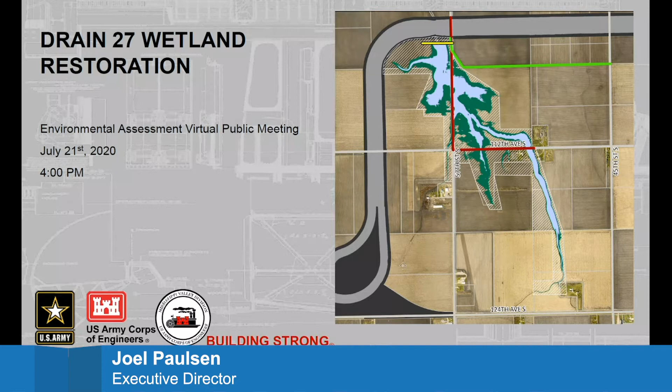Thanks, Joel. It's also worth mentioning, on the comments piece, that we had a meeting previously on April 30th with some of the impacted landowners, and some of the comments we got from them will also be used as feedback to improve this project as much as possible. We've also had a number of meetings with our project team to come up with the best design possible, and with different state and federal agencies—we just had a meeting last week to get their input, including North Dakota Game and Fish, North Dakota Department of Environmental Quality, and the State Water Commission, among others. So we're taking comments not only from the public, but also from those agencies during this time.

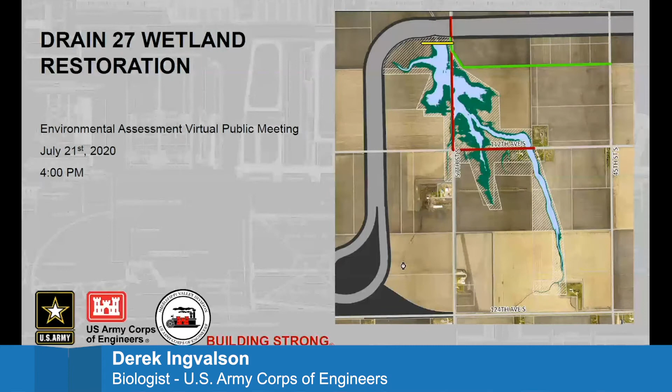Then we're going to jump into a little bit of wetland background. If you were on that April 30th call, some of these slides might look familiar. We just want to make sure that people are all educated on what the wetlands are, what that means, and so forth. Then we'd like to go into reasons why this was chosen as the Wetland Restoration Project.

There's a number of different options out there. Those weren't all the same. There's pros and cons to each of them. Ultimately, this was the one that was chosen, and we'll go through that.

Then we'll move into the design. We've got a lot of really good people working on this, and we've gotten a lot of feedback from the agencies and trying to make this the best that we can. We've got the mitigation that we need to fulfill, but we're working with those agencies to make sure that they've got goals and objectives when it might come to habitat or other things. And if we can help meet those needs as well, we might as well incorporate some features that would help with that. So we'll talk about design and what all went into that.

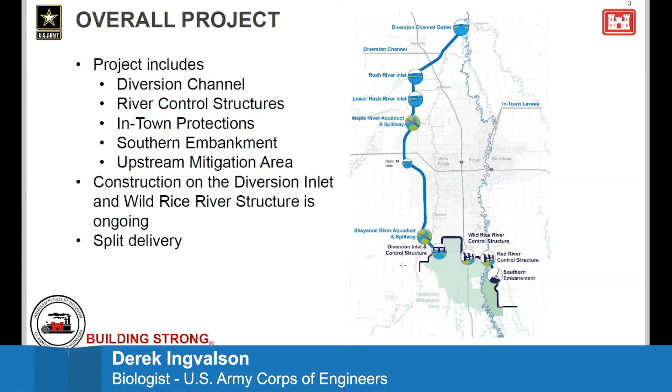With that too, the wetland mitigation for the diversion channel is being completed within the diversion channel itself. The southern embankment and those structures along the southern embankment — that's what the Drain 27 wetland will be mitigating for. So we'll go into that a little bit more as we go along here, but next slide, please.

The second one, hydrology — you have to have the right kind of water there. If you don't have the water there, you're not going to have a wetland. You may not need as much as most people think; it doesn't have to have standing water all year long. The hydrology needed for a wetland is saturated conditions for 14 consecutive days in a year. And then finally there's the vegetation, and vegetation in wetlands isn't just what most people think of — cattails and lily pads and that sort of thing — there's a number of different wetland types.

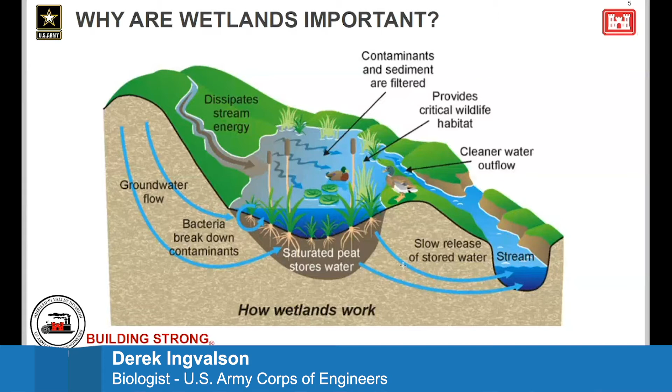They have a lot of great functions, including water purification. They provide flood storage, process carbon and other nutrients, and slow down flows to help reduce erosion. They also can lead to a number of recreational opportunities, such as hunting, bird watching, hiking, and canoeing.

Wetlands are also very important to the animals, the critters that are out there. Wetlands have some of the highest diversity of any ecosystem, and a lot of times you'll hear that they're just behind rainforests and coral reefs as far as diversity goes. Waterfowl use them a lot, obviously, and a lot of other bird species do as well along their migratory route. It's a great place for them to rest, to fuel up on vegetation or little critters they're eating along the way.

There's also several waterfowl species that may nest in wetland areas, like dabbling ducks. That includes mallards, teal, wood ducks, and several others. They have a lot of different value to those species.

Then there are species you may not think of as often being out there, like salamanders or other rare and conservation-type species, especially in a wetland like this one where there won't necessarily be any fish, because there isn't a connection to a waterway most of the time, and even when there is, it'll freeze out over the winter. That's very good for those amphibian species, to not have those predators in the area.

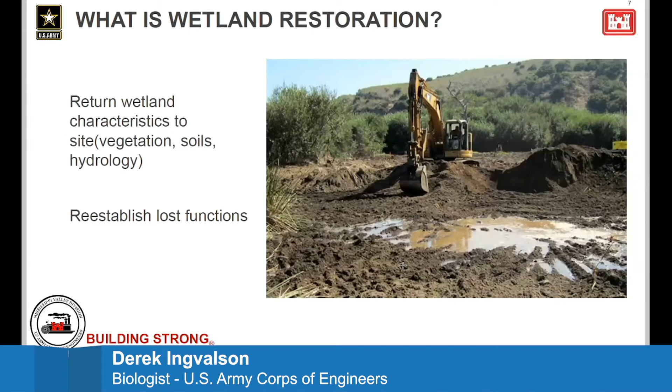So why is this project being considered? There's a number of different reasons. Joel talked about this a little bit in the introduction, about how we need to mitigate for unavoidable wetland impacts. And I guess the question is, where does that take place?

There were different options we looked at. We looked at a few different sites, bounced back and forth, and looked at the pros and cons of each. Most of them in the end ended up being dead ends after we looked at the pros and cons; they just didn't make much sense anymore.

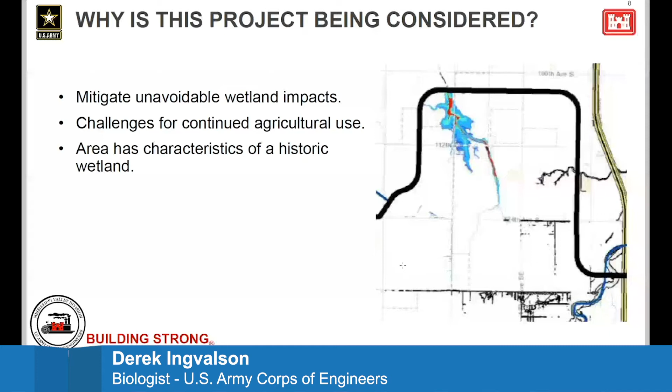So we had the opportunity to create this into, or restore this into wetlands, and we started looking into it more, and it started making more sense. Instead of trying to look at solutions to try to keep this dry, it made a lot more sense to make something wet that wants to be wet. So that's where we went with the wetland restoration with drain 27.

This slide is just taking a step back and looking at the southern embankment. Where is the project located? If you're familiar with where the diversion inlet structure is and where the Wild Rice River control structure is, it's between those two, kind of in the area known as the camel hump area that humps up between those two structures, and it's toward the western edge of that area.

Now the next few slides, we're going to talk about the design a little bit and go into some of the features that are in that design. There are several features within the complex here itself.

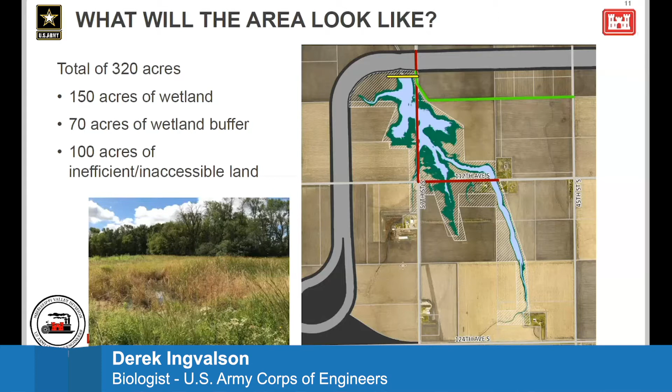Next we're going to go into more in-depth discussion on assessments that were done to help design some of these features. So I'm going to turn it over to David Hilgeman—he's a hydraulic engineer at the Army Corps, and he'll go through the next several slides. David, go ahead.

David, are you on mute? Rocky, do you need to unmute David? I certainly can. He must be calling in by a phone number. I assume he's the 651 number. No, I don't think so. Maybe he was unable to join us. I thought I saw him on here earlier.

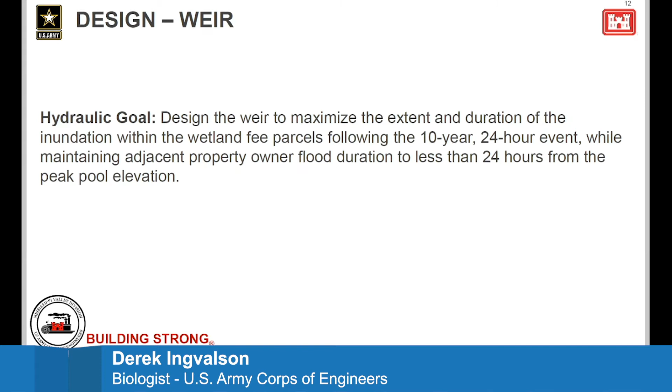Okay, so part of the design of this project was to design this weir that goes across the wetland, so that we have a wetland functioning for the majority of time, but also that the parcels around the wetland, that the 10-year, 24-hour rainfall event would allow the property owner flooding area to be drained outside of the boundaries in less than 24 hours from when the peak water surface elevation is in the pond, the wetland.

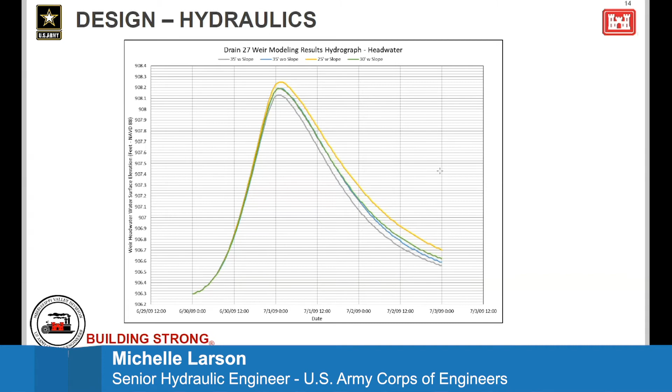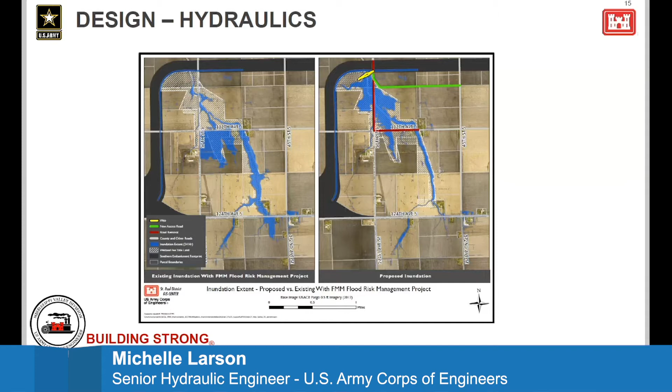Next slide, please. Okay, so the left-hand side is the previous image with the existing inundation. So if the Fargo-Moorhead project were there, this is what the inundation is going to look like.

The image on the right hand shows us the project that we're proposing for the Drain 27 wetland. So you can see lines showing where the roads are going to be removed. The yellow line is showing us that weir that kind of blocks off the Drain 27, and the green is just an access road there.

So sometimes people ask, well, why is there more inundated area shown with this project when there's a weir across it than with existing conditions? That's because with those roads there are some culverts through those roadways that are undersized, so water doesn't drain off as efficiently. If those roads are removed, those culverts are removed, the water farther upstream can actually drain better, and it'll concentrate more closer in our wetland area itself.

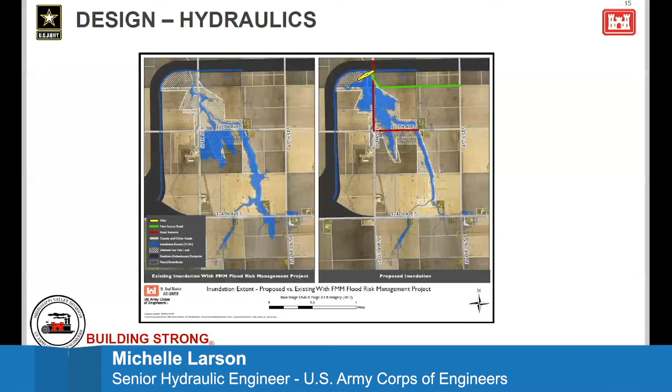Derek, should I keep going? Yeah, go ahead if you want, or I can jump in.

It doesn't matter. Okay, so in our weir, one of the things we want to design into it is a low flow pipe. This would be a way that if maintenance is needed, some of the water could be drained out of the wetland so crews can go through and weed it, remove sediment, or whatever they have to do.

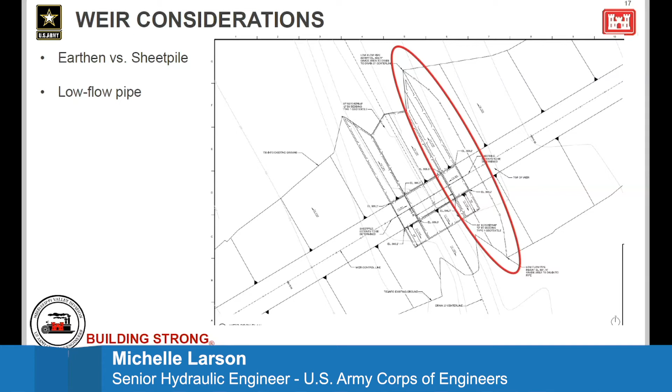Yeah, so I can jump in there a little bit, Michelle. That low flow pipe's primary reason is to have another option for maintenance. If anything happens to the structure, like erosion, or repairs need to be made, it could be drawn down for that. Also, if we don't get the vegetation response we're expecting within the wetland, that gives us an option to open it up, drain it down, reseed, and start over with the vegetation within the wetland complex.

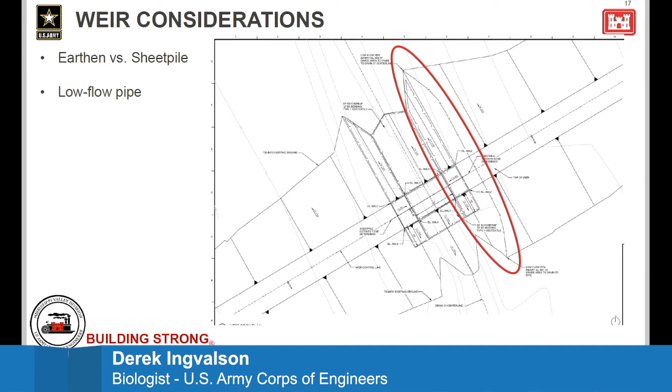Next slide. I'm not sure. This is all earthen versus sheetpile.

Another design aspect we've been looking at is recreation. Recreation isn't a feature being considered as part of this project at this time, as part of the Drain 27 project, but it is being looked at by MetroCog as a whole for the entire Fargo Metro project. They currently have a recreation plan as part of the Agassiz Greenway Master Plan—I've provided a link on the screen for folks interested. They're also looking for ways to get funding, whether state, federal, or whatever, to pay for recreational features.

That said, even though we're not looking to have recreational features as part of the Drain 27 wetland restoration, we want to make sure we're making things compatible with them. So we've had a few conversations with MetroCog, asking what thoughts they have, and trying to lay out good places for trails, kiosks, and trail accesses. So we're keeping them in the back of our minds during design, not necessarily moving forward with them as part of our project, given different restrictions we have at this point.

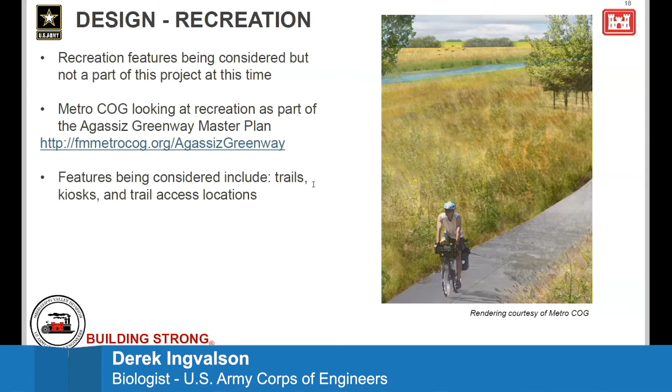Next slide. Now we'll start to talk about drainage. This is a concern that came up at the April 30th meeting—folks wondering how water leaves their land and how that works over the duration of construction. So we'll go over some construction sequencing, and Michelle will walk us through that as well.

Okay, thanks, next slide please. This is showing existing conditions—an aerial photo of Drain 27. You can see the flow arrows through there. Vertically through the middle of it is 57th. My image disappeared, but there we go—Drain 27 crosses 57th Avenue as it goes through there. Next slide please.

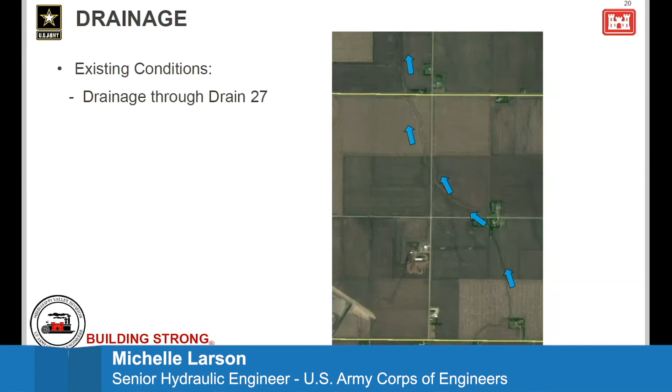Okay, so this is what it would look like with wetland construction. During the sequence of scheduled events in the area, this wetland construction would start in 2022. The weir and access road would be built, then those two parts of road removed so the flow can fill up and go into the wetland. When water leaves the wetland, it drains back into the same Drain 27 channel downstream, just like it usually would. Next slide.

So then the next piece to be constructed would be the southern embankment, SE-2A—that's the piece shown in the lavender color on the screen. That's going to be built in years 2022 through 2023. While that's under construction, and once it's done, water will still be able to go through Drain 27. It enters the wetland and leaves through the weir, continuing back down the Drain 27 channel. Next slide.

Then in 2023 through 2024, the southern embankment, the SE2B, is going to be constructed. They're going to be leaving a gap in the southern embankment so that drain 27 drainage can continue on. The actual distance of this gap is still being analyzed, but what you're seeing there is the minimum size. It could actually be larger than that, but that's what they have there. Next slide.

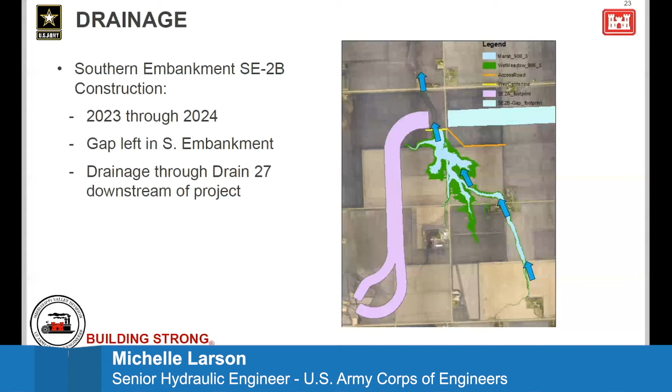So this is showing the project fully constructed. The lavender thing you see there is the full southern embankment. Down at the lower left-hand corner is the inlet structure to the diversion channel. There's going to be a borrow ditch that goes alongside the embankment on either side. So water is going to enter drain 27, the weir will be there, it'll flow over the weir, and it will flow into the borrow ditch. This gap in the southern embankment is going to be the last thing filled, last thing constructed, so that the water can flow there.

Once the water flows over the weir, it will flow into the borrow ditch. Right there, it's showing some flow arrows going away from drain 27. The actual split of where it's going to flow, to the north or south or east or west, is still being finalized, but it may end up being at 112th Avenue, which I don't know if someone can point out on the screen.

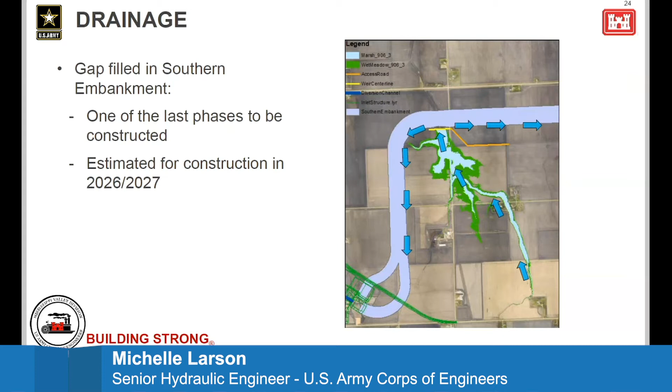Michelle, I think the next slide might show it better. It still shows the drainage this way, but it has 112th on there.

Okay, there we go. This is just another view of this. You can see where the roads have been removed, those are the red. The access roads in green, the weirs in yellow. You can see the flow arrows coming through the little channels upstream and ending up in drain 27 wetland, and then the flow going alongside the southern embankment to drain into either the Wild Rice River or the inlet structure.

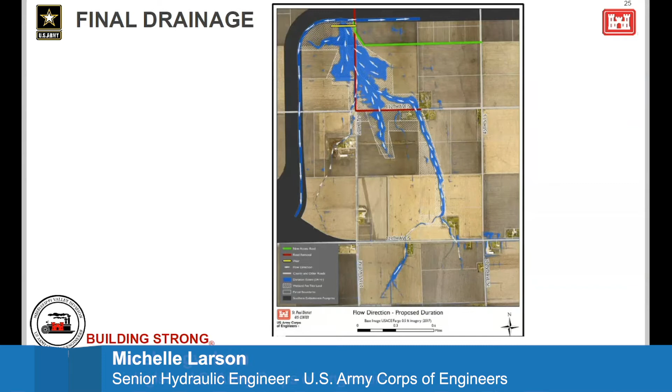I think that's it for mine. Derek, back to you. Thanks, Michelle. Next slide, please.

Actually, we'll go to Leanne. She's the biologist that put together the environmental assessment, and she'll talk through some of the environmental effects from the project. So Leanne, go ahead. Okay.

So what are some of the environmental effects of the project? The first one we want to discuss is agriculture. With the project, approximately 1 mile of drain 27 would be abandoned, and about 300 acres of land that's currently being farmed would be taken out of production.

The Wetland Restoration Project has been designed to ensure that farmland outside of the project parcels is not inundated for more than 24 hours following a large summer rainfall event. Also, in order to fully restore the wetland, we have to remove portions of 57th Street and 112th Street — 4,300 linear feet of 57th Street and 2,700 linear feet of 112th Street. We are, as a team, working to make sure that affected residents would have alternate routes for traveling in and out of the area. Next slide.

The project would have an overall long-term beneficial effect to wetlands by restoring about 84 acres of wet meadow and 66 acres of marsh-type wetlands. As Derek went over earlier, restoration would provide habitat diversity, wildlife habitat, and also the ability to improve water quality by filtering out sediments, nutrients, and pollutants. We're also going to see a big difference in the vegetation in the area. Currently, the area is in row crop production, and that will change to native wetland and prairie vegetation. If anybody is interested in the species we plan to plant, we included the seed mixes as an appendix to the environmental assessment.

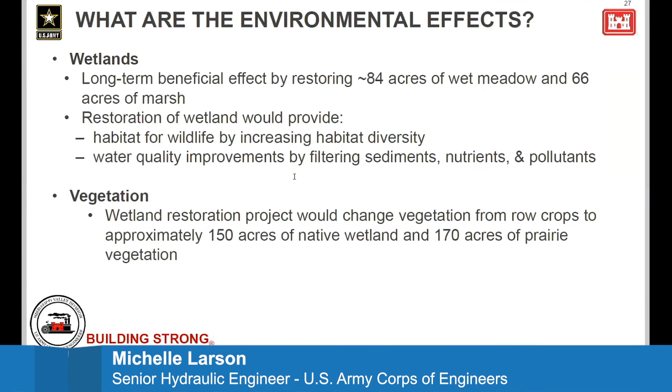Rocky, can you go back to slide 17? Okay, go ahead. So the earthen embankment would be what we refer to as a broad crested weir—trapezoid shaped, similar to just an embankment—with a riprap covered slope on the downstream side to help dissipate energy.

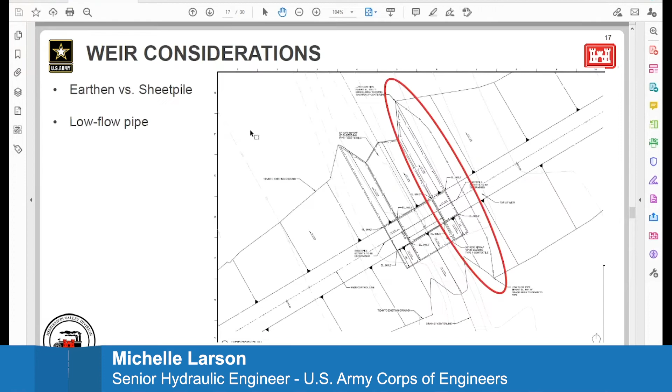Then if we did a sheet pile weir, it'd be what we call a sharp crested weir. The water would go over the top of that weir and fall for a few feet down to some riprap to help dissipate energy before continuing downstream. The notch for the sheet pile weir is a 25-foot wide notch, and the discharge through these different types of weir differs based on the geometry and how smooth the flow is.

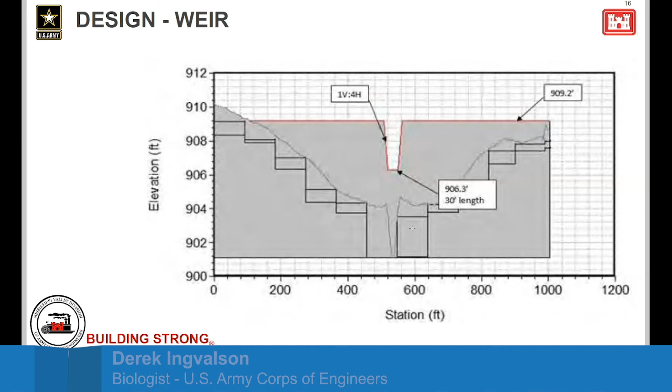So what section was it? I'm curious, in what township? Somebody could look that up, I'd appreciate that. Is this Christy? Yeah, Christy, I can get back to you on that. I just don't know off the top of my head.

Say, Derek, this is Lyndon. Was that with respect to that Drain 51 wetland site that we were taking a look at? Or is that a different site? It was the one that was going to be potentially overbank excavation along the river there, I believe. Okay.

Well, you can mitigate wetlands anywhere in the United States. You can go 30, 50, 100 miles to the west, and there's willing sellers for 1/50th, 1/100th of the cost of what this project's going to cost you. So I don't understand why you would even consider putting a wetlands in this flat ground.

Because once you saturate that 320 acres and the cattails come, the water ain't going to drain. So a 2-inch rain event in May or June, our crop is lost. With this wetlands in our flat ground, we will never harvest a crop again within that 3,000 acres.

It's expensive. Michelle, have you been part of that gap analysis, or Lyndon? This is Michelle, no, I haven't. I can't help you with that. Okay.

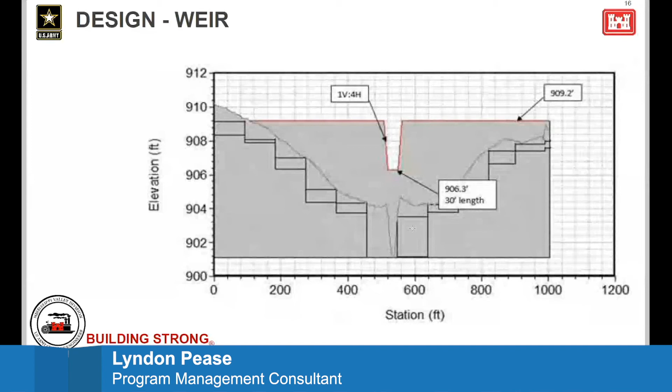Hey, Derek, this is Lyndon. I've just been in a couple of meetings, and I know that gap analysis is in progress. It's part of the Southern Embankment design, and so that's still being studied and evaluated. Part of that gap analysis, Mike, is looking at what the best size of that gap is to make sure impacts are minimized overall during that interim time period when the project's being constructed but not operational yet. So unfortunately, I don't have an answer for you on that one.

This is Mike Dubord, talking for my mother. We've got 160 acres there, and about half of it will be taken. Why not buy the whole 160 acres from us? Then I don't have to worry about it.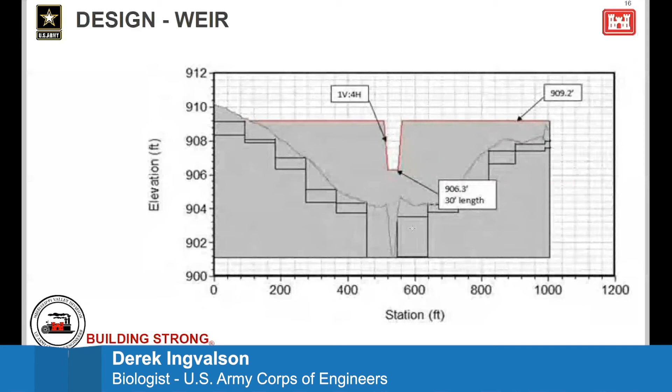Dean is part of the land acquisition team, and he might be able to answer that question better. Hi, this is Dean with AE2S. I believe the Dorothy Dubord parcel is on the southern edge, just south of 112th Avenue South. Is that correct?

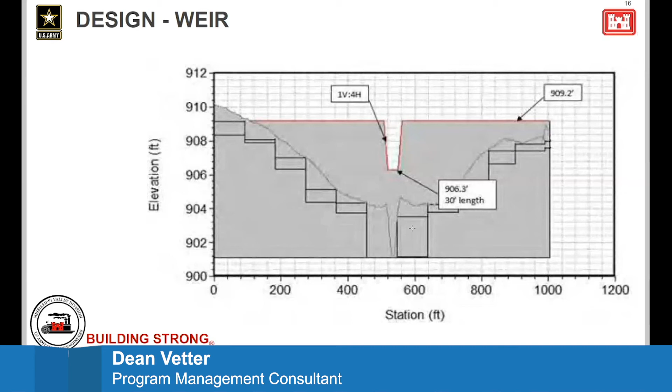We can look at those scenarios because we've done some full acquisitions in the area, especially in what's referred to as the Camel Hump area. On one of the maps you had shown, you got two different shaded areas.

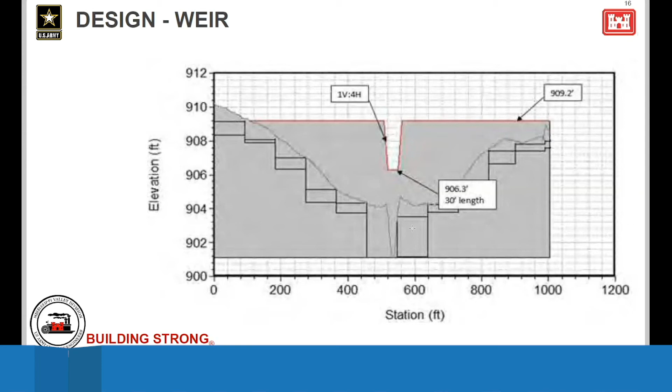Rocky, can you jump to one of the overall project maps for Derek? Okay, you see, you got two different shaded areas, the hashed areas. What's the difference between the two?

So I can cover this one. You've got the blue, light blue, and green areas. The light blue is a marsh-type wetland. The green area is like a wet meadow, which might resemble more of a prairie-like wetland, a transitional wetland. Then you've got the hatched area, where we went through and looked at different parcels and tried to determine the best place to break the parcels.

I understand that, but in the hatch areas, you've got two different sections. Oh, you mean where there's maybe boxes of hatched areas? I was just wondering what's the difference between those two hatched areas. Yeah, I think that's just a product of the map layer being made. They could probably be dissolved together so that it was one continuous area.

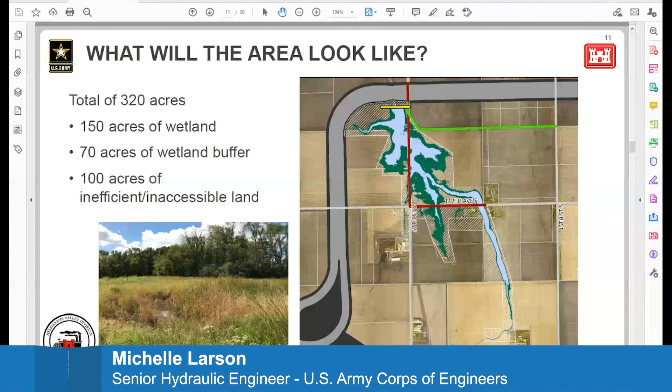So did that, I think, the modeling - is the question how many inches of rain in 24 hours are we talking? For your modeling, what are you using for a rainfall event? I think it's 3.2 inches of rainfall. That's what we have in the EA.

Okay, I think this summer, if you look back at any of the records around eastern North Dakota, there's been numerous 3.2 inches and probably more like 4, 5, and 6. So then what happens? Going back to the question that Mike asked, who's going to pay for our losses out here? Because if we get 5 inches, we're done trying to drain through this area. So we need - so what's going to happen to that?

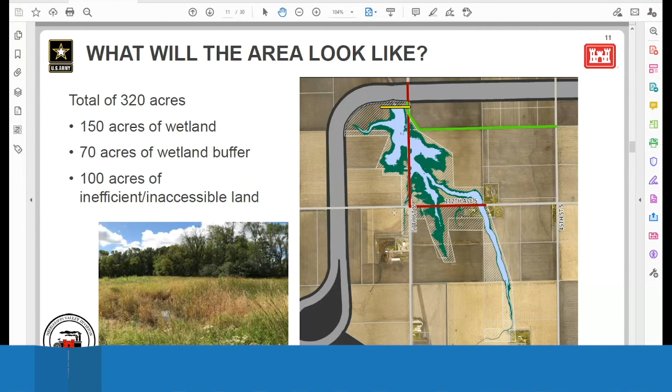Okay, without this drain, without this weir, how long would it take to drain the same area with a 3-inch rain versus with this weir? Are we double the time, triple the time?

Yeah, and I think that goes back to slide number 8. Wait, is it slide 8? I need a computer. Can you navigate to that, Rocky? Oh, sorry, that's not the right one. It's the one with the side-by-side images. Yeah, so that's what it looks like here.

Now, if you go 2 slides further, this is showing that second picture. So with the flood risk management project in place on the left, what the 24-hour rain event would look like, and then on the right, what it would look like in a 24-hour, 10-year rain event.

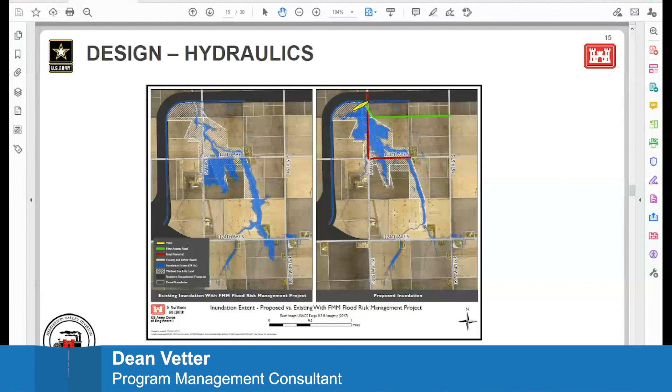Do you have any other questions or comments regarding the overall project? If there are other questions particular to certain tracts of land, or just real specific, we could handle those at a separate meeting as well.

I have a question. When you talk about the diversion authority paying for this crop insurance, don't forget that the money the diversion authority gets, one way or the other, comes out of our pocket as taxpayers. So an expense is an expense to me.

Second thing before we go, and I don't know if everyone else is done, but my last comment is, the next time you do a slide presentation, I don't want to see how great the recreation is going to be along any of these projects. To me, that's a kick in the gut. It's not about recreation at all.

Yep, and that was just to be transparent with the different things being considered, so it was just included for that reason. That again is going to be paid for by the diversion, which also comes out of my taxes, whether it's state or federal or county money.

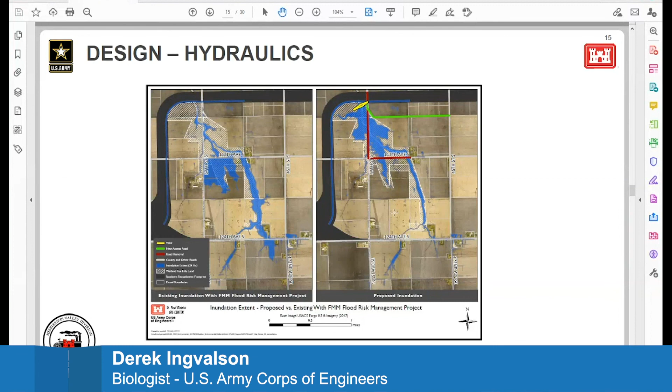Are you just south of 112th Avenue South? Yes. Okay, yeah, it does seem like that gets constrained pretty tight around that. Like it doesn't spread out much, so there must be a little bit of elevation there. Yes.